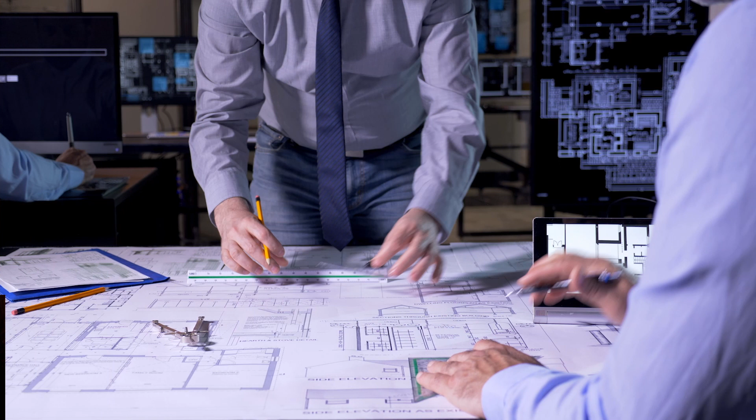Are you interested in learning about the world's most expensive construction mistakes? If so, you've come to the right place. In this episode, we'll be uncovering the secrets behind some of the world's biggest and most costly construction blunders. So buckle up as we take you on a journey of the world's most expensive construction mistakes and discover how they could have been avoided. Do you know of any expensive construction mistakes? Let us know in the comment section below.

Let's start the video. The world's most expensive construction mistakes are a testament to the cost of cutting corners. From bridges to skyscrapers, these costly errors have forever changed the face of construction projects and the industry as a whole. Such mistakes can be attributed to a variety of factors, ranging from inadequate planning to poor communication, and even unforeseen geological or environmental issues. From project delays to multi-million-dollar cost overruns, these cases are far from isolated incidents. Let's start the list of some of the most expensive construction mistakes in the world.

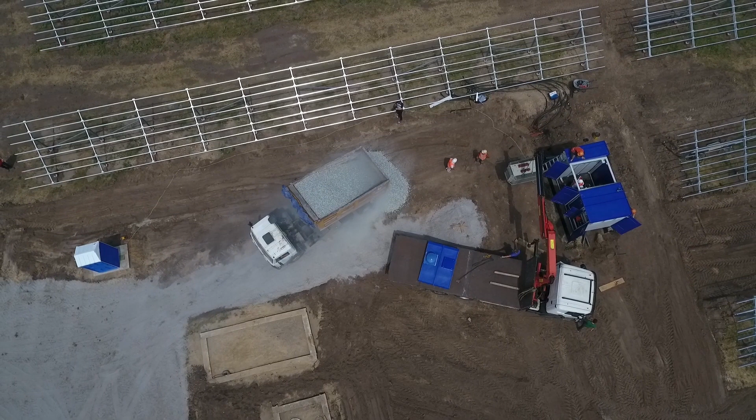The Willow Island disaster. On April 27, 1978, an incident occurred at the Willow Island power plant in West Virginia that would forever be remembered as one of the most expensive construction mistakes in the world. The construction of a second cooling tower at the plant had been underway, and the scaffolding collapsed as a result of the falling concrete, killing 51 workers.

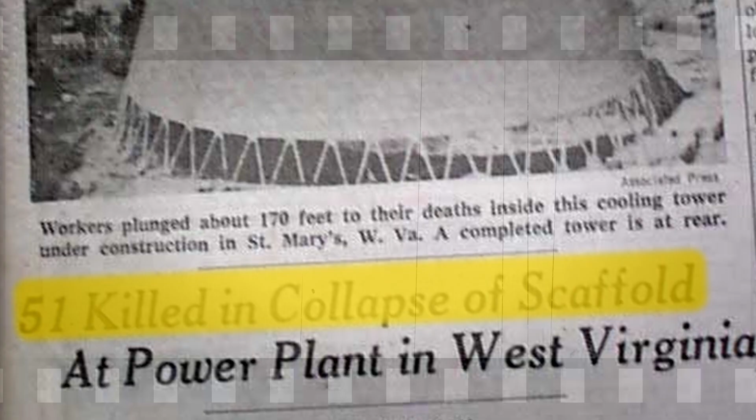An inspection team from the Occupational Safety and Health Administration, or OSHA, arrived and began an investigation, with assistance from the National Bureau of Standards, or NBS. The Allegheny Power System had been constructing a larger plant to accommodate 2 new generators, with a total capacity of 1,300 megawatts. Both the new and existing generators were to be cooled by the 2 cooling towers.

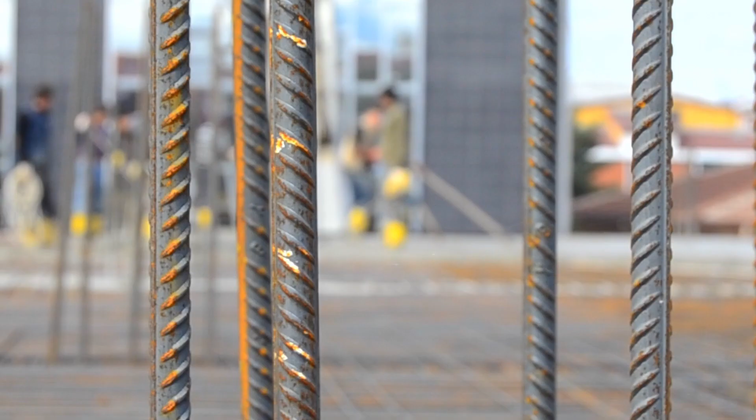The first was completed in April 1978, and the second was constructed when the incident occurred. The investigation by OSHA and NBS revealed that the collapse was due to a lack of proper support underneath the concrete pour. This lack of support, combined with the weight of the concrete, caused the scaffolding to collapse. In addition, the concrete had been poured too quickly and without enough time for the forms to adequately set and dry. The incident at Willow Island caused a great deal of financial and emotional stress.

The cost of the incident was estimated at over $90 million. The families of the victims were severely impacted, not only by the loss of their loved ones, but also by the lack of financial compensation that many of them received.

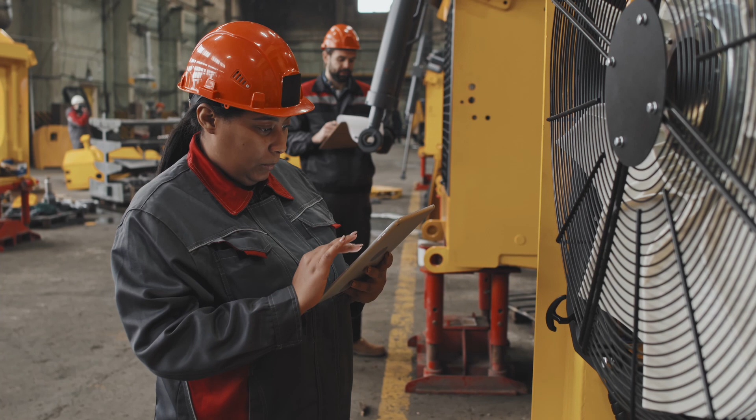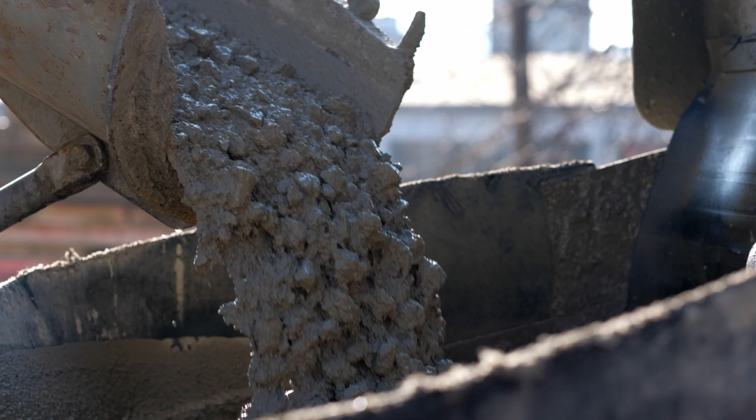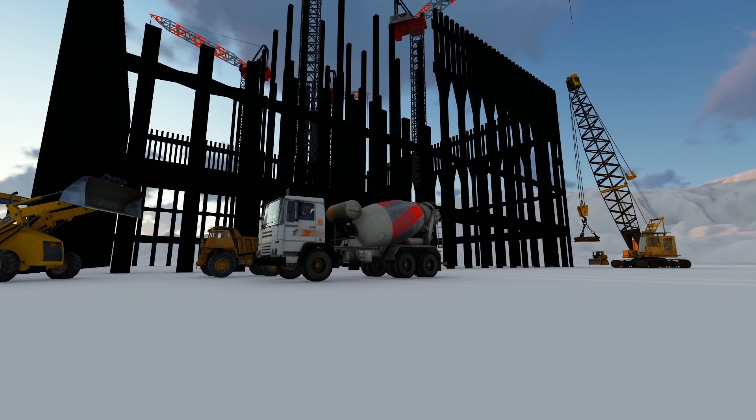The incident at Willow Island was a tragic reminder of the importance of safety protocols in construction. It highlighted the need for proper support beneath concrete pours and the need to ensure that the forms are allowed to adequately set and dry. In addition, it was a lesson in the importance of recognizing the human cost of construction mistakes and providing adequate compensation for the victims. The disaster at Willow Island stands as one of the most expensive construction mistakes in the world and serves as a reminder of the importance of safety protocols in the construction industry.

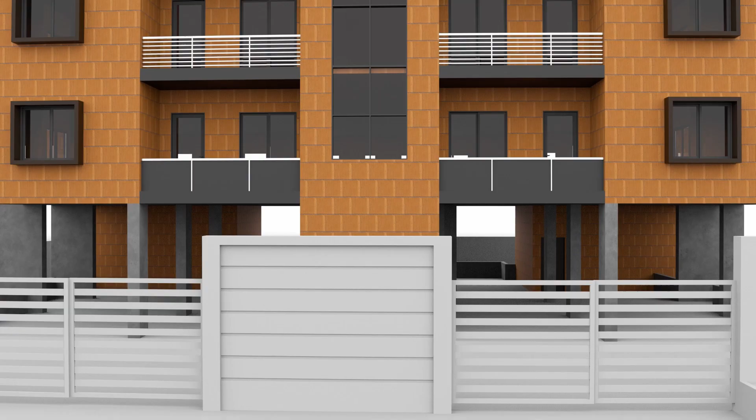Liang Star City. Liang Star City was a project in Kunming, China, that was initially meant to be a grand residential and office complex. The project was initiated in 2011, and construction began on 19 high-rise buildings on 4 large sites. It was initially a success, and the first 4 high-rises were completed, but due to financial concerns, construction on the remaining 15 buildings was halted in 2013.

Years passed, and the buildings started to get flooded with rainwater, leading to foundation damage that was beyond repair. In December 2020, another real estate company bought the property and project rights for around $150 million, and they quickly found that the 8-year-old buildings would no longer meet the demands of a changing real estate market, and decided to demolish the unused buildings. In August 2021, the planned demolition was initiated.

Over 4 tons of explosives were placed, and measures were put in place to make the demolition as safe as possible. Finally, the buildings came down in 45 seconds, reportedly making it the largest at-once demolition in China.

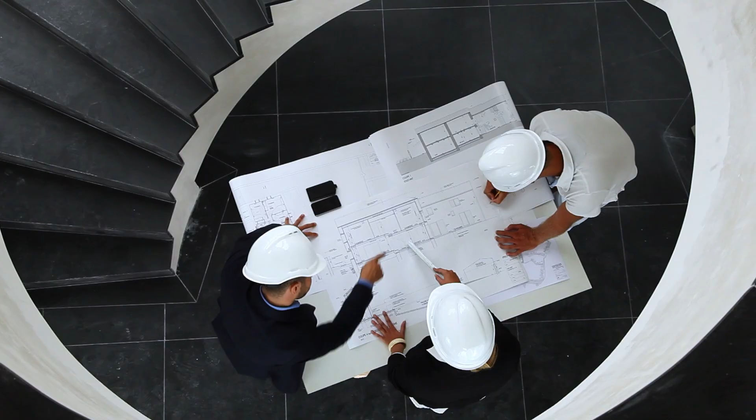The construction mistake of Liang Star City has been a lesson to developers and investors everywhere. The project was highly ambitious, but failed to take into account the changing needs of the market and the potential for environmental damage. This is a cautionary tale of what not to do when it comes to construction projects. The Liang Star City project serves as an example of the importance of properly assessing risk and preparing for the unexpected. It also serves as a reminder to be aware of the changing needs of the market.

The Olkiluoto 3 nuclear power plant. The Olkiluoto 3 nuclear power plant in Eurajoki, Finland, is one of the most expensive and catastrophic construction mistakes in the world.

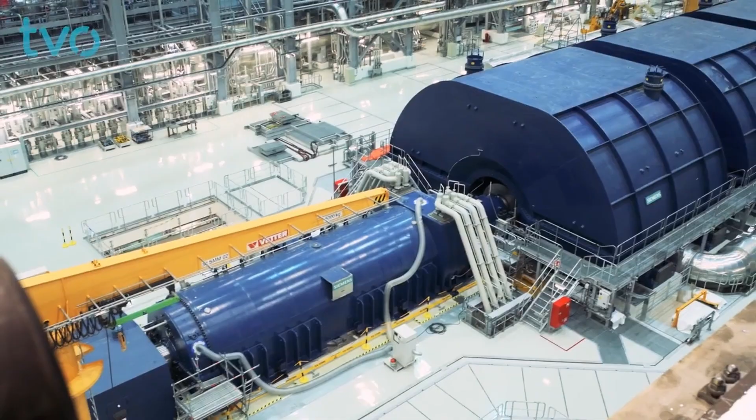In 2005, the Finnish government decided to increase its nuclear power production by nearly 60% to reduce its reliance on coal, and the construction of the 3rd unit of the Olkiluoto nuclear power plant began.

The project was originally promised to be completed by 2010, but instead it is still under construction today and is estimated to cost $11 billion, nearly 4 times the original budget. The project has been plagued with construction delays, business disputes, supply chain issues, and scheduling delays, making it one of the most costly construction mistakes in history.

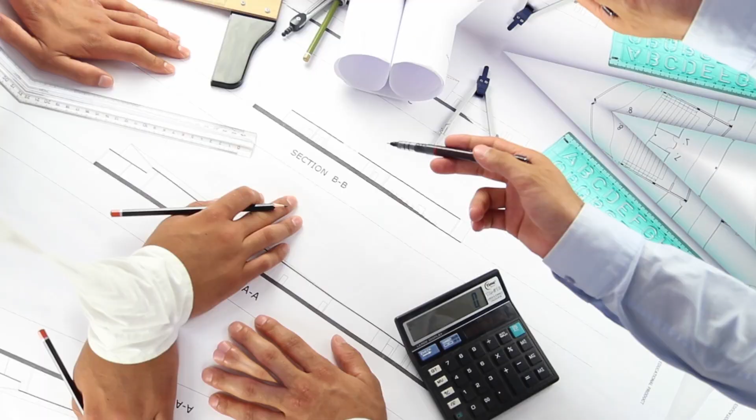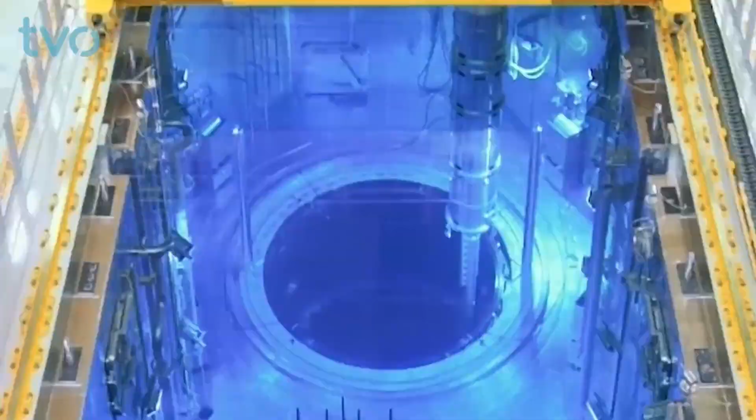Part of the problem is that no one has built a nuclear reactor in some time, and experienced builders left the business in the 15-year lapse between previous reactors and the construction of Olkiluoto 3. Contractors were also not prepared for the exacting standards required to build a safe nuclear reactor, leading to issues with the concrete foundation, metal parts, and welders.

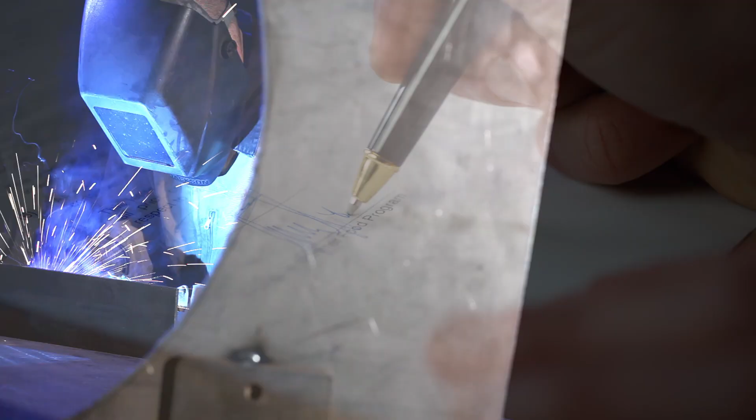There was also a lack of planning on the project, leading to documentation and licensing taking years to sort out. The consequences of this mistake have been immense. Not only have the delays cost millions of dollars and wasted resources, the project has also had a major impact on the environment due to the emissions released during construction.

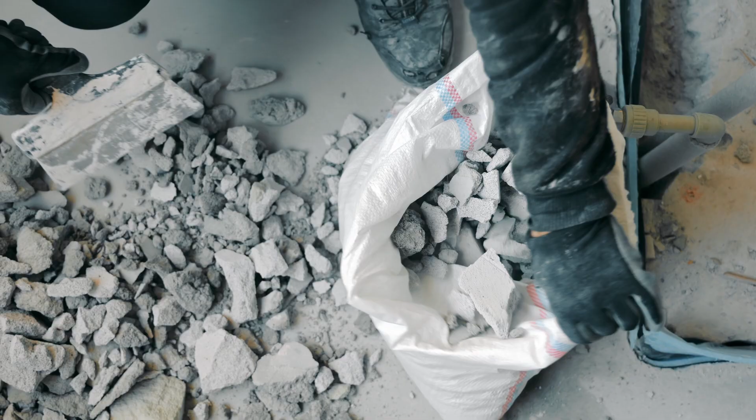Furthermore, the delays have caused a strain on the Finnish economy, as the government has had to allocate more resources to the project than originally planned.

The Olkiluoto 3 nuclear power plant is a cautionary tale for any future construction projects. It's a reminder of the importance of careful planning, proper budgeting, and experienced builders in order to avoid such catastrophic mistakes. What can be done to prevent similar construction mistakes from happening in the future?

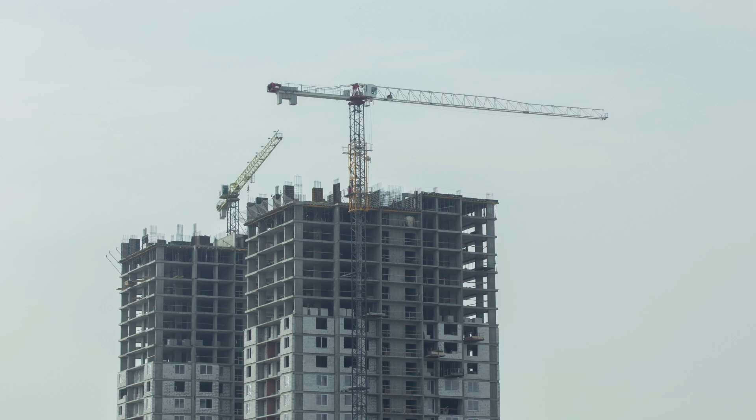The Millennium Tower, a residential skyscraper located in San Francisco, is a prime example of a construction mistake that has cost a large sum of money and caused much distress to its occupants.

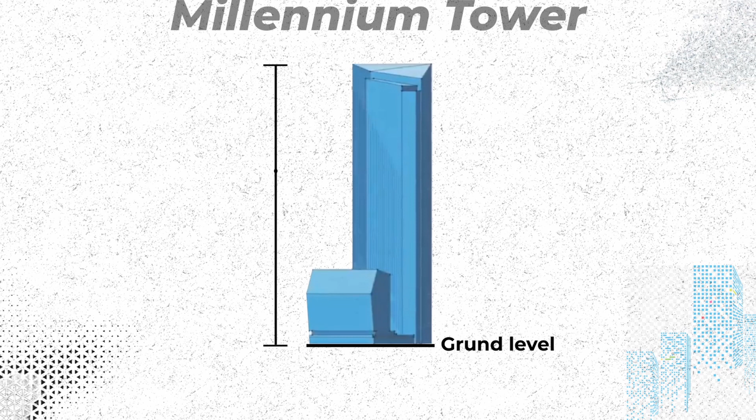Completed in 2009, the building was the 6th largest in San Francisco, standing at almost 200 meters tall. The construction of the tower cost the Mission Street Development LLC a total of $350 million and seemed to go smoothly, or so they thought.

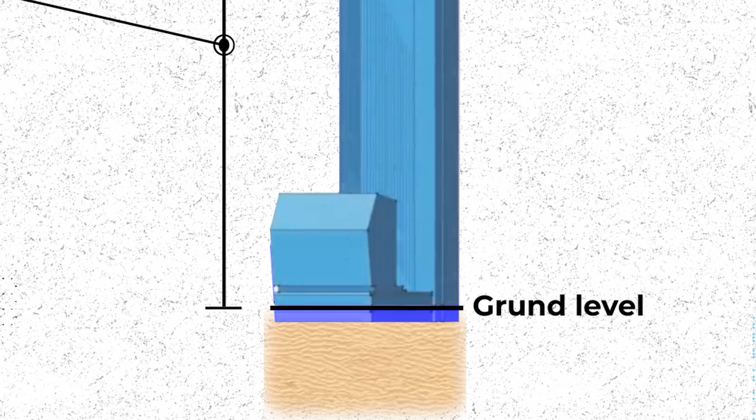In 2016, the residents of the tower found out that the Millennium Tower was slowly sinking and tilting into the ground. An investigation revealed that the foundation of the tower was built into deep sand instead of the bedrock, which was unable to support the heavy building.

As a result, only 7 years after it opened, the Millennium Tower had sunk 40 centimeters or 16 inches, and in addition to that, there was a 15 centimeter tilt at the top.

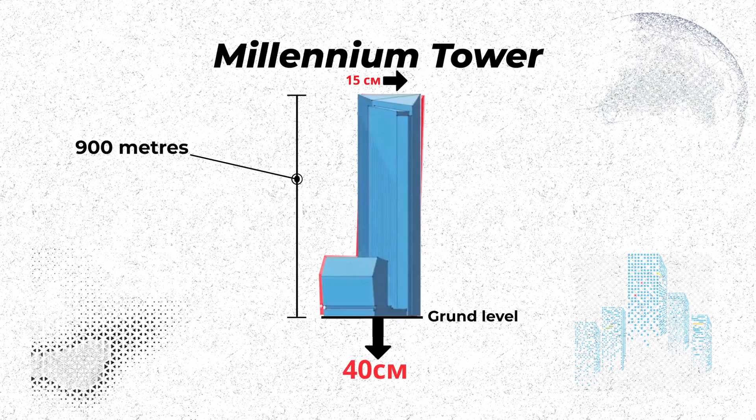Lawsuits began almost immediately after the information was released. The City of San Francisco and the Homeowners Association in the building sued the development team, who in turn blamed another company responsible for building the neighboring Transbay Transit Center.

However, it turned out that the problem had occurred before they even started. In September of 2018, many residents reported hearing creaking and cracking sounds. In the middle of the night, residents on the 36th floor woke to a loud popping sound. A broken window found in a corner unit implies that there are deeper structural problems at the Millennium Tower.

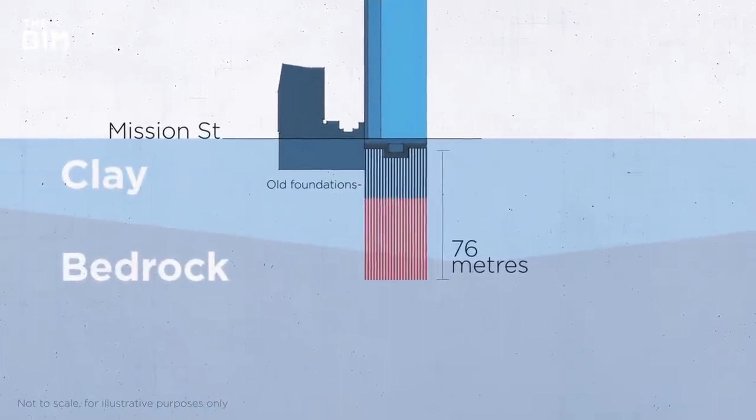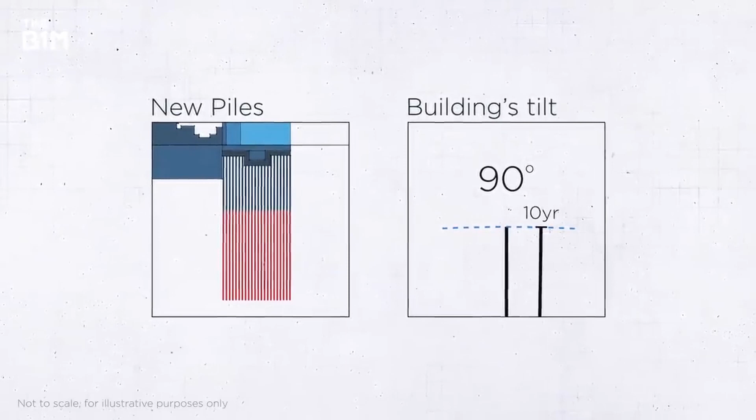Eventually, the lawsuits were consolidated, and a settlement was issued to fix the problem. The solution? Engineers set down a $100 million plan to drill into the bedrock on the north and west sides of the tower. The plan was to install over 50 new piles that would reach up to 76 meters down to the bedrock, bracing the towers and reducing tilt over a period of several years.

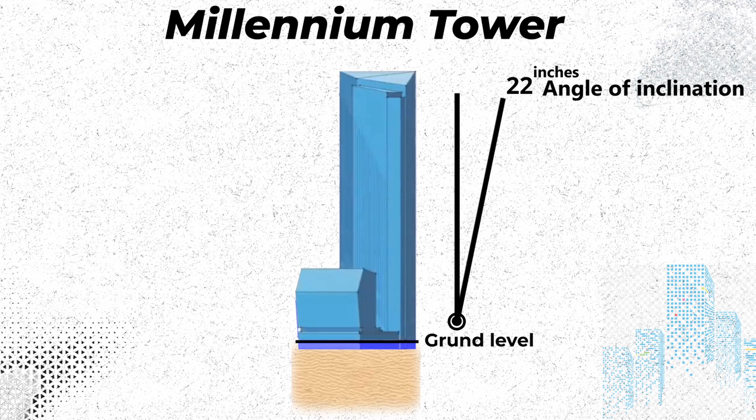Construction of the new foundation started in 2020, but recently had to be halted again in August of 2021. Those in charge of monitoring the project noted that the tower had sunk an additional inch and the tilt increased again. As of now, it leans more than 22 inches at the top, and the problem is under investigation again before returning to work on the fix.

The Millennium Tower is a prime example of how a construction mistake can cost a large sum of money, cause distress to its occupants, and take a long time to fix. Despite the efforts to correct the issue, the building is still leaning and sinking, and the future of the Millennium Tower remains unclear.